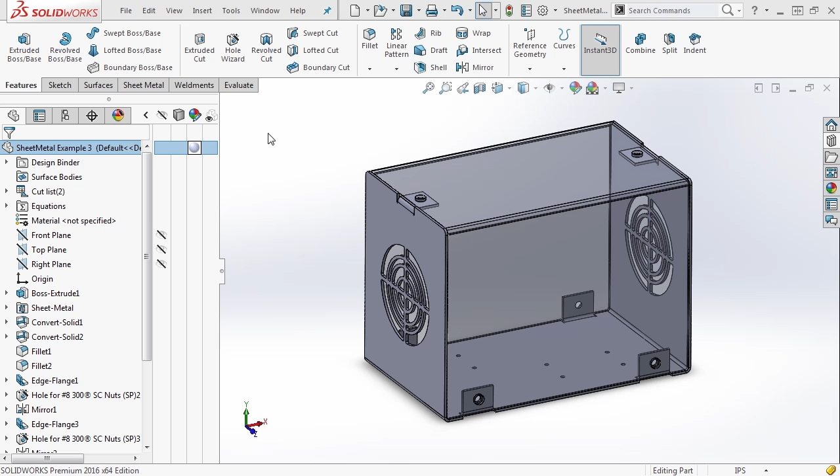We're just about done with our sheet metal part, but we need to add just a few more details. To start, we're going to hide the top part again, go to our sheet metal tab, and add some sheet metal gussets.

We're going to be going from this face to this face, and we're going to reduce the size. We'll do a 1-inch inward offset, and under the profile dimensions, use an indent depth of 1/4 inch. Go ahead and say OK, and then we're going to mirror that.

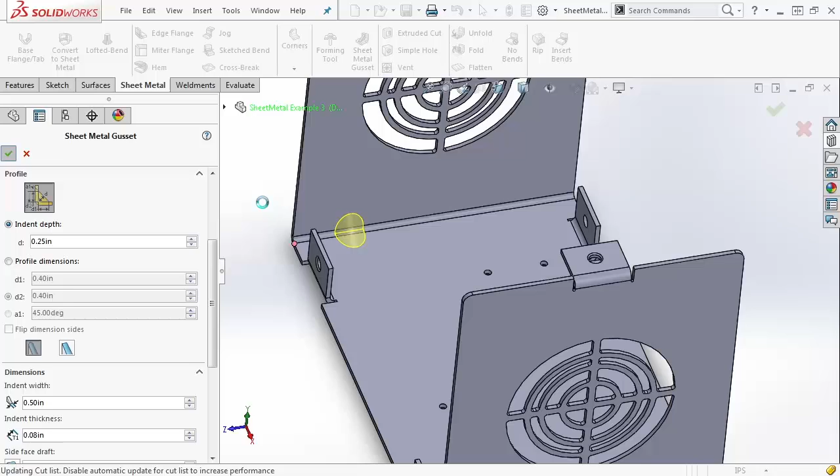I'm going to select the gusset, go to our feature tab, and mirror it first across the right plane. Then we're going to select the gusset and the mirror, and mirror that across the front plane. So that gives us a little bit more structure in the bottom corner.

Even though we have the top restrained, we want to make sure that the bottom doesn't tend to flex or bow. We also want to add one more detail in here.

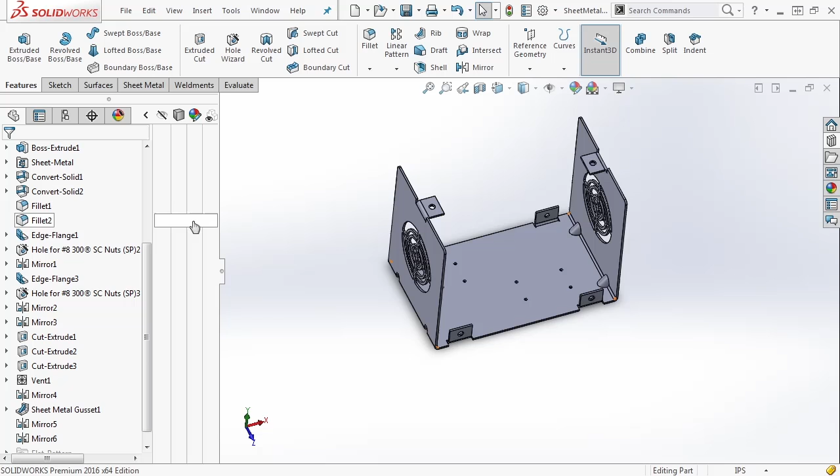We're going to do a sketch. We'll select the front plane, and add a flat line, one up at an angle, back down, and another flat line.

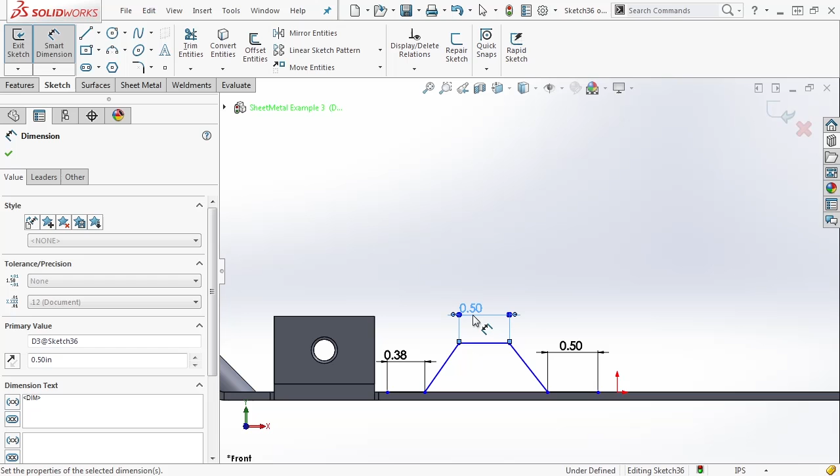We're going to add a few dimensions here. This first line is going to be 1/2 inch. The line on the far end is going to be 375. The top line is going to be 1/2 inch, and we want to make sure that it's 0.375 up. And then we want to add an angle here of 130 degrees.

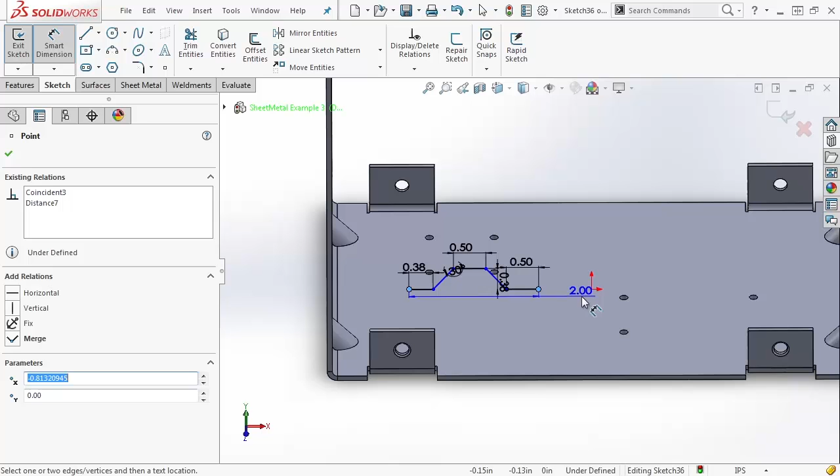We're going to select this line, Control select this line, and make them equal. Now we almost have a fully defined sketch, but we need to locate this. We're going to pull it off to the left just a bit, and dimension this endpoint to the origin, 2.00. Now we want to take this sketch to our sheet metal tab, and use one of the options in here to create a flange.

So even though we've already made a base flange, we're going to take that sketch, extrude it out 1 inch, and use it to make a base flange.

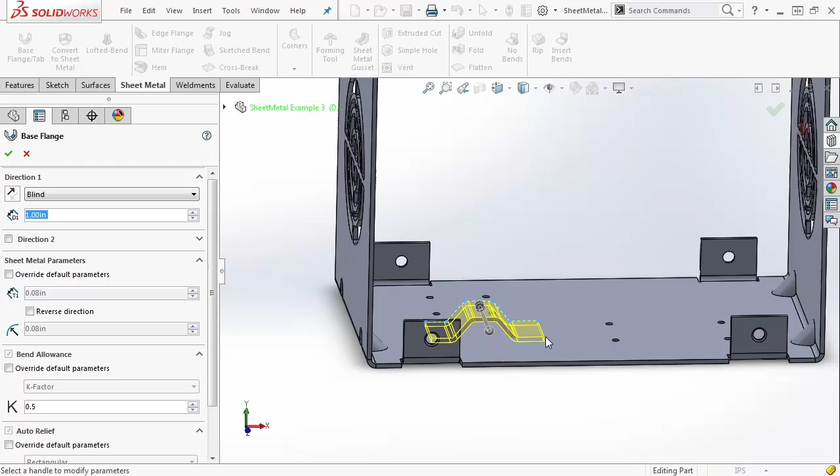Now as we look at it, we want to make sure that it's going above the sheet metal right here. So we might have to change the direction and reverse it. You see we're creating another sheet metal tab that we can use to space off some different components, and this allows us to have a complete solid bottom.

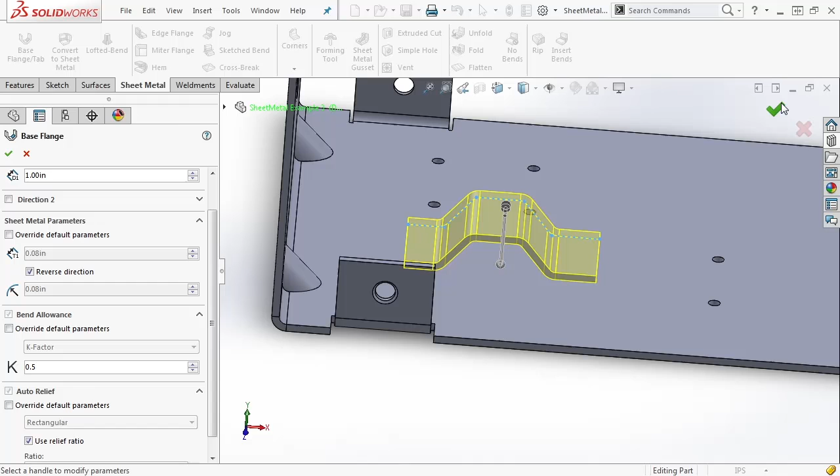Now of course you could do this a few different ways by making a cut and actually having it bend up inward or formed up inward. But if you don't have that capability, a lot of times you have to make these little brackets and weld them on.

So from this point, we're going to go to our weldments tab. We're going to create a weldment, and then add a weld bead. And the weld path is going to go between this face and this face. Now we're simply going to weld it on both ends.

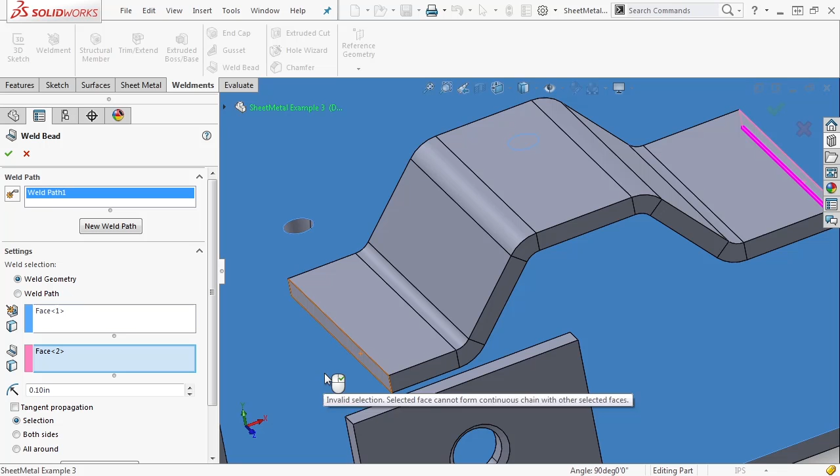You'll notice that when I try to select a secondary face, it doesn't allow me to do that. But if I select weld path, I can specify a weld path. So let's go ahead and specify a weld between these two faces. We're going to add a new weld path, and add one on the other side as well.

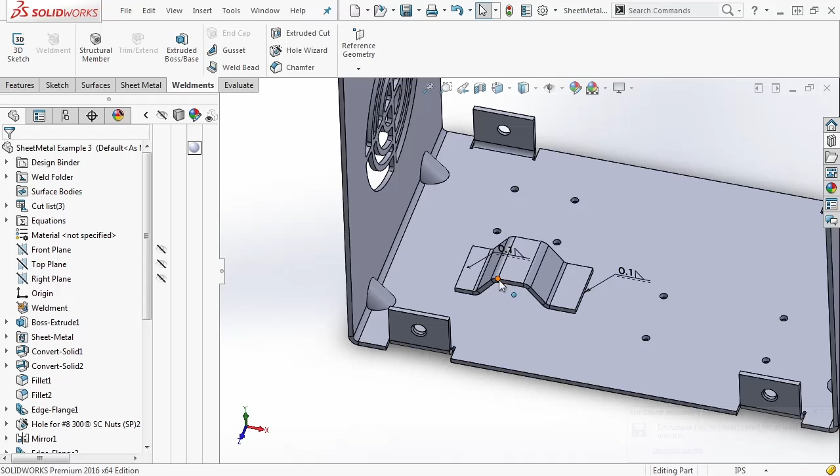So now we've effectively taken this new bent bracket and welded it to the bottom of the inside of our housing. Let's go ahead and show all 3 components. And now we've created a very simple sheet metal housing.

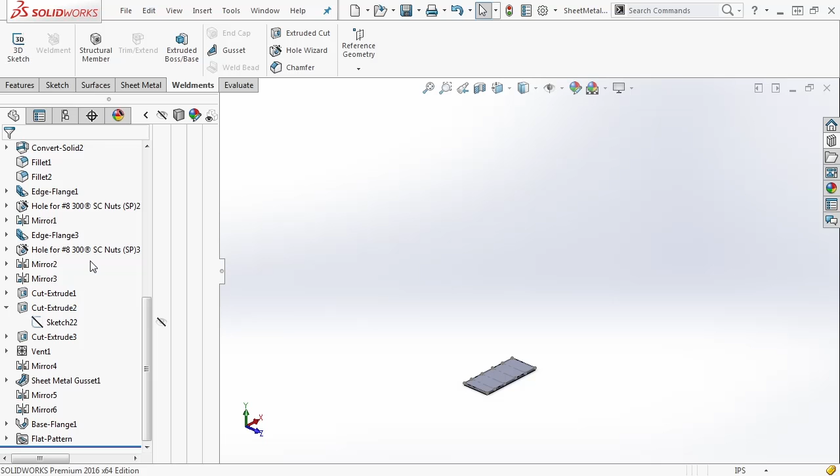Now, when you make a sheet metal part, you really want to make sure that it is actually manufacturable. So what we want to do for each of these parts is select them, right-click, and flatten them to make sure that we're not left with any components that physically cannot be made.

Let's go up to our Mirror5, and let's flatten it and make sure that we don't have any issues here. Now it looks like everything here is good to go. We don't have any overlap sections.

We can go back and exit flatten, and then we're going to show the external part. Flatten that, make sure that everything's okay here.

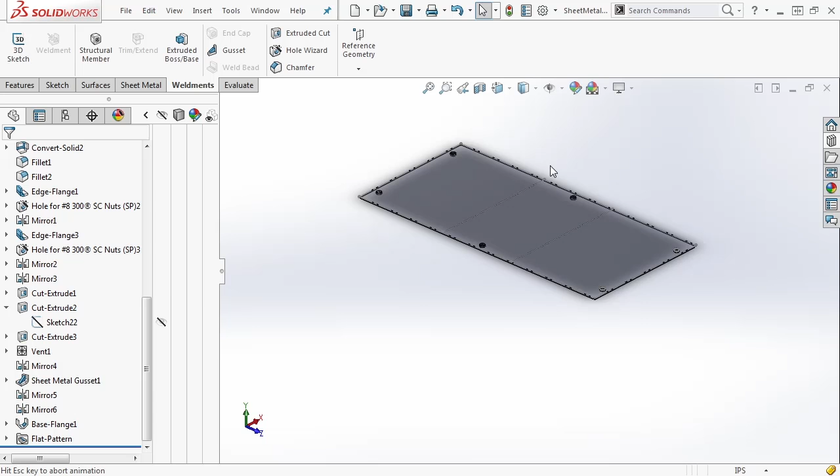Now once you have the flattened parts, that's really the end of this in terms of manufacturing. You're going to send the file off and you're going to have it manufactured.

Depending on who you're specifically dealing with to manufacture these parts, you might have to flatten them, select the face, right-click, and export to DXF DWG.

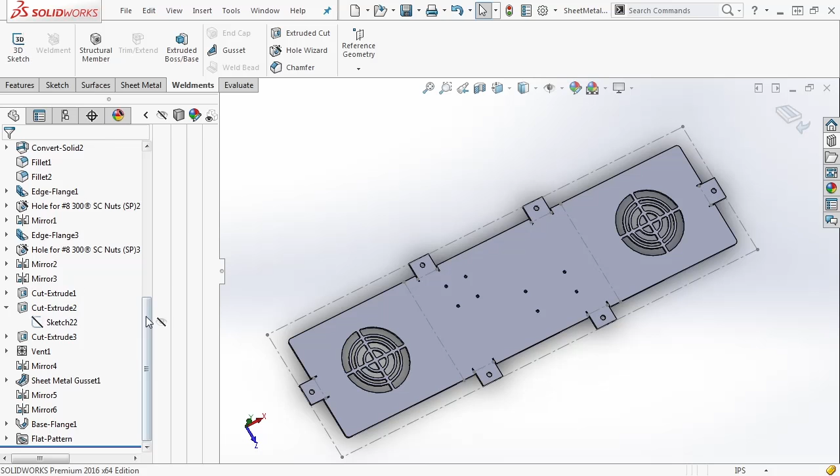Now, one thing that SOLIDWORKS has added in the past couple versions is the available option to export all the parts from your cut list.

One of the new available options in SOLIDWORKS 2015 and 16 is the available option to select your flat patterns folder and export. Now this allows you the option to export all of the available bodies in one sheet or multiple sheets. So it's a very handy option for you to take the flat pattern of individual parts and send them out all at one point in time.

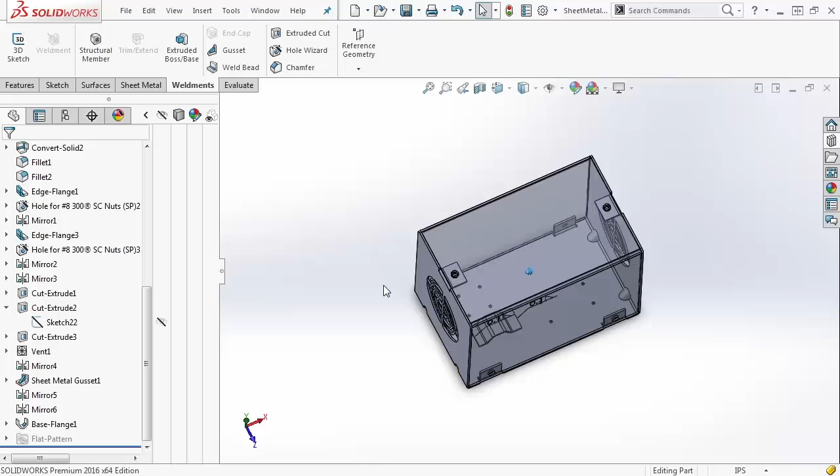So usually what happens when you make a complex file like this is you're going to flatten all the parts and send them off. So it's one way that helps you out with SOLIDWORKS. If you have 5 parts, 10 parts, 20 parts all in one file, it can quickly and easily make that work just a little bit easier.

So let's go ahead and save this. Again, we're going to do a save it as example 4. And congratulations, you've completed your basic sheet metal part.